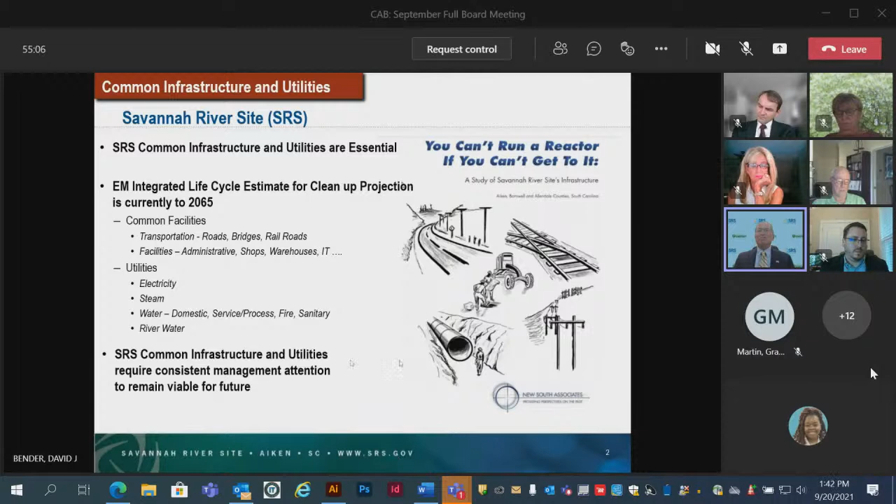And the site, as you know, is a busy place. These are our major operational mission facilities that are located on site. And this doesn't even include the future pit processing mission there in F area.

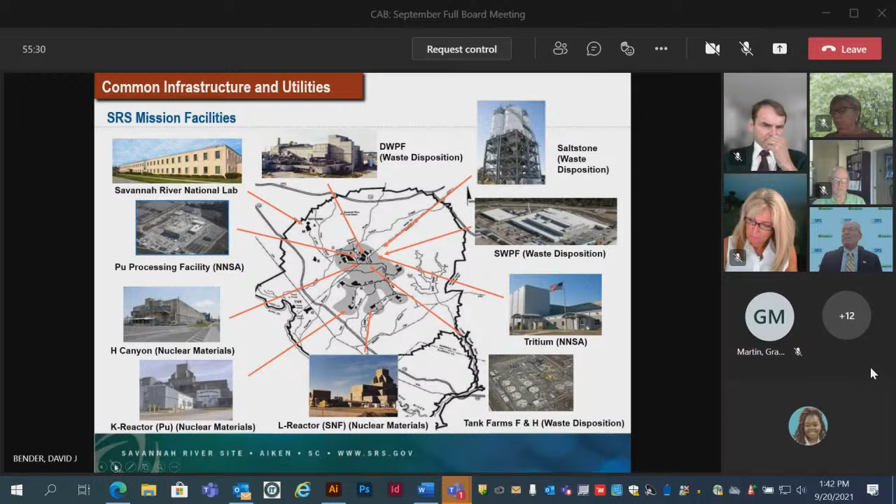And to support these mission facilities, just like any other city or large industrial park, we provide and take care of basic utilities that include roads and bridges, as well as domestic water and sanitary wastewater. And each area has its own fire water systems.

I would like to take a few minutes to point out some of the Savannah River site's unique infrastructure and utility systems. One of those is that we have steam plants. We have 5 steam plants that burn biomass wood chips as their primary fuel. And these provide steam energy for a mix of both processing as well as environmental controls.

Further, we're kind of unique for a DOE site in that we have 2 high hazard dams. And these dams themselves are not hazardous, this is simply basically a FEMA designation saying that there's a potential for loss of life downstream should one of these 2 dams fail. And I'm talking about what we call Par Pond and L Lake.

More unique is that we have a river water system. This system was originally designed to provide cooling water to the site's 5 heavy water reactors. Since then, the river water system has been tailored to provide water to our largest steam plant and to ensure that the radiologically contaminated sediments in our 2 major lakes, those are the 2 dams I mentioned earlier, stay covered with water.

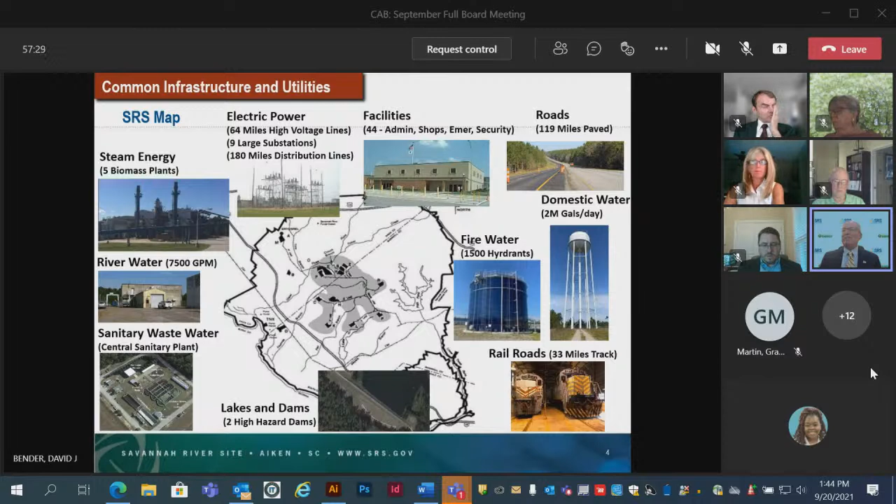Now, in the 2 previous slides, I talked about our major mission facilities and then our common infrastructure and utility systems. One thing that's really important is that I emphasize the difference between mission facilities and common infrastructure utilities. Why would that be important? Some of you probably already know, and that's because we have to figure out how we're going to pay for each of these. We'll see more of that on the next slide. But in this slide, I wanted to point out 3 of our basic common infrastructure types that we have.

The first basic type is just buildings, for our shops as well as our administrative areas, and of course roads and bridges. The other type of infrastructure we have is your basic utilities, not to mention river water that I talked about earlier, and of course our steam plants and steam distribution systems.

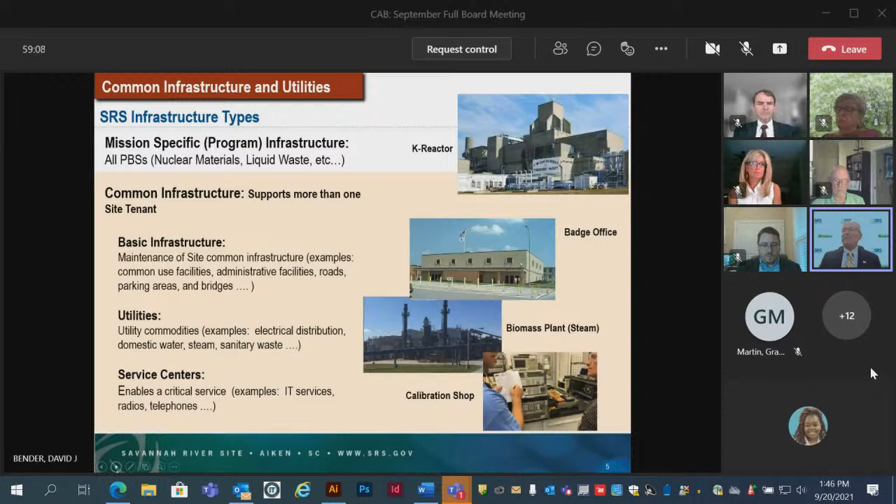Now, here's how we get funding to run SRS. Well, that comes through appropriations. And through appropriations, they get broken down to us into what's known as program baseline summaries. You'll hear a lot of talk about PBSs. So all of the mission programs, such as nuclear materials, has their own PBS. So does liquid waste and also our environmental cleanup mission.

So our common infrastructure isn't funded through PBSs. Our common infrastructure is funded by the site through the setting of rates, so that each year our PBSs can then contribute to funding our common infrastructure and utilities. So as you see on the left-hand side for our utilities and services, what we do is look at what we spent or what we required in the past. We look at what's forecasted, and then we have to look at what our requirement is to, say, provide electricity or provide water. And then we have to come up with a rate. And that rate is what the PBSs will need to pay in order to get that utility or service.

I think you've probably seen the insurance commercial, you know. So in this case, the mission facilities, through their PBSs, pay for what they need. This is pretty much like what you would do at your own house. Basically, you need electricity, therefore the local utility provider provides you with the bill on what you consume. Just like that, our mission facilities need electricity, and they pay basically through our site management and administration and accountants, a kilowatt per hour rate.

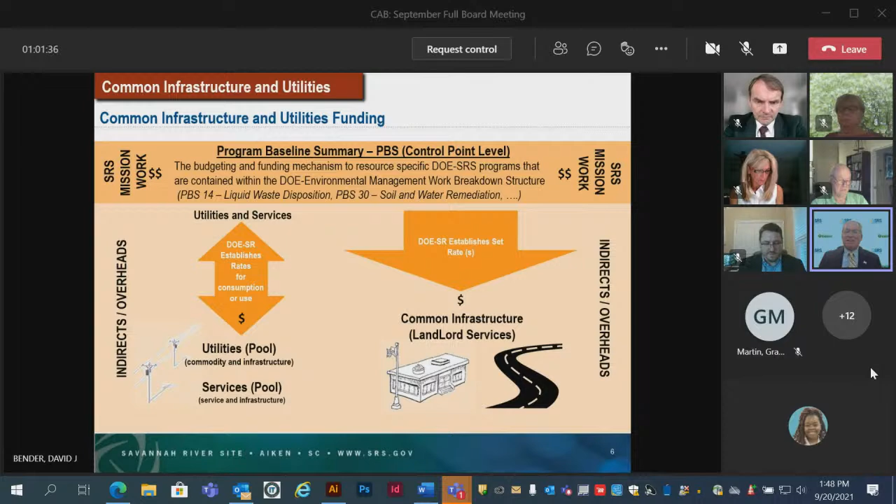Another way we can look at this difference between mission facilities and common infrastructure and utilities is what we call the fence. We often refer to inside and outside of the fence. So like your house, any plumbing or electrical work or even a roof repair, guess what, it belongs primarily to the homeowner. But up to, say, that electrical meter, then that belongs to the utility.

So much like that, in our case, inside the fence, the mission facility will take care of whatever they need to maintain their infrastructure to their PBS budget. Meanwhile, outside the fence, that is my or our responsibility. And that work is how we get funded through those indirect rates that I spoke on in the previous slide.

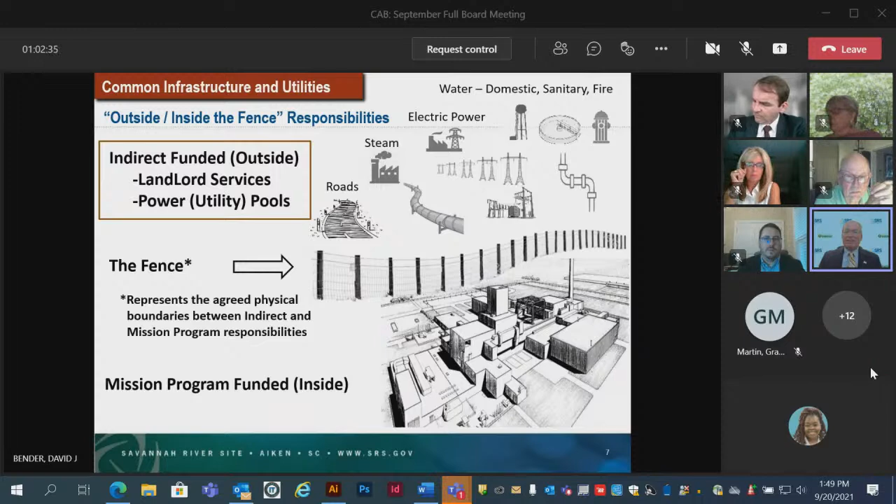Our mission is to provide infrastructure and utilities to the site to make it all work, and this is a 24/7, 365-day task. We report each system daily, look at what their status is and what they're trending monthly, and track all the improvement projects we're pursuing that year on a weekly basis.

Our job is also to look beyond just today and the immediate next week, but also into the future. So every 5 years, we do an in-depth study of each of our infrastructure and utility systems to forecast future requirements and the latest technologies out there, to propose recommendations for delivering more efficient and reliable services in the future. We are currently scoping out the remaining recommendations and building them into our 5-year improvement plan.

Not only are we working on these recommendations and dispositioning them, either incorporating them or finding that the initial recommendation in our right-sizing plan may not be feasible, but we're also looking at how we can incorporate sustainability when we do building improvements, to reduce our energy intensity across the site. We've been doing this quite well by incorporating cool roofs, and I'll show you a slide of that a little bit later, whenever we replace a roofing system on either one of our common infrastructure facilities or even our mission facilities.

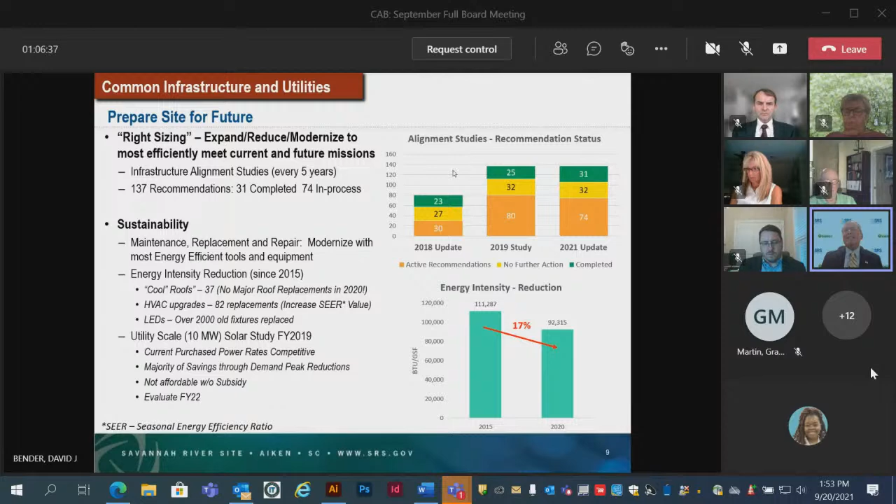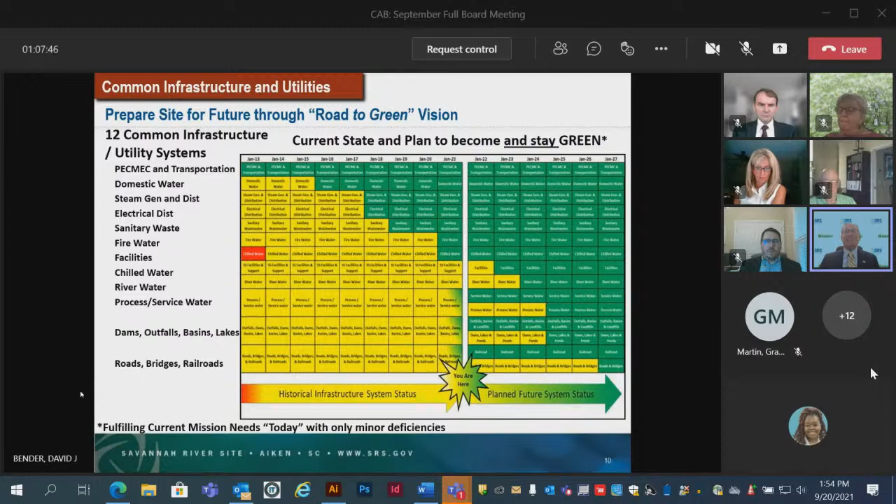Same thing a little bit with the utilities. Our budgets have been kept fairly constant because we want our mission facilities and mission programs to have first priority. We negotiate every year on how many dollars can go to landlord services through our indirect budgets and utility rates. This is very important in balancing mission and support, and it's never an easy decision each year as we go into our execution year.

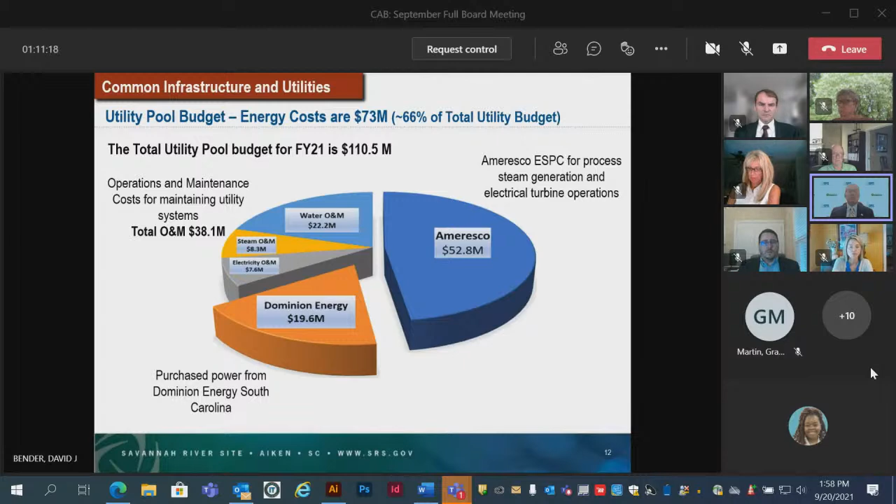Once we have all that information put together, we put together plans so that we could plan not only our operations and maintenance from day to day, but also our program for improvements based on what we believe our budgets are going to be in the out years. One of the things we do, which I'll talk about briefly later, is that we look at our risk—what do we need to provide reliable infrastructure, what do we need to fix in the next year to keep it green, and how can we make it more efficient?

And of course, we'll have to look hard at our budgets and make those hard decisions and prioritize. So each winter, we put together a new 5-year plan, and that coincides with a budget cycle.

What we do is make this a realistic plan. It's not a pipe dream that sits on a shelf where we say, gee, if we only had an extra $5 or $10 million, what would we do with it? No, this is a plan that we put together based on the funding that we believe, or we're pretty confident we're going to get, and yes, we include those projects that we believe we could execute if possible, if we got some extra money that year.

That means the programs have to have good, solid base budgets, and they've got to be able to execute those base budgets before we can have that good year. Also, what we put in these plans is that we resource the design dollars and the prep dollars so that we can get our engineers to work and have projects sitting on the shelf, so that when those good years arrive, we're going to be ready to execute.

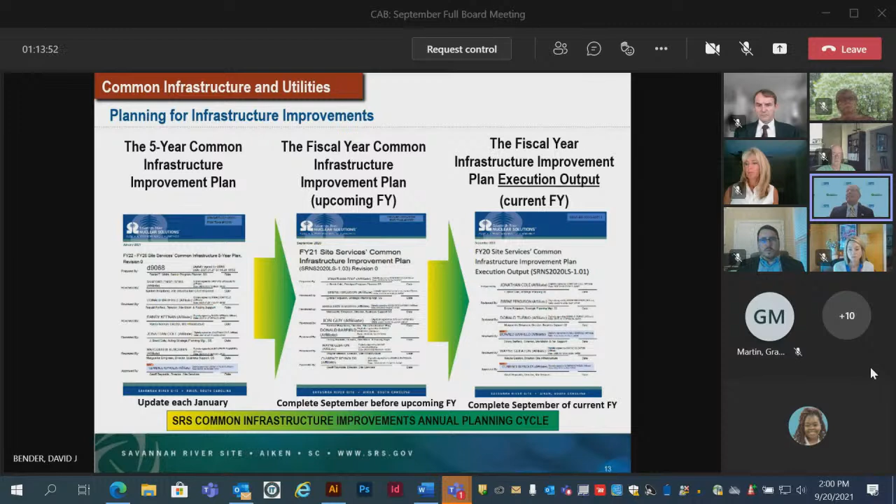So that's our cycle. We start with a 5-year plan. Based on that 5-year plan, we put together our next fiscal year plan, and then we evaluate and take our lessons learned from the current year plan and reincorporate that right back into the common infrastructure planning cycle.

Now we like to talk about the old car analogy. I'm proud to say I used to have a 25-year-old car I would drive to work. I maintained it, changed the oil like I was supposed to, checked the tires, made sure the lights worked. But did it have all the bells and whistles, the backup cameras, the Bluetooth systems, and was it as efficient as today's? Heck no.

Would I take it on a long trip? Probably not. So what I'm getting at is that we're doing a heck of a job maintaining these aged old systems and replacing when we can, but it's still, in some cases, not a 25-year-old car - the backbone of a lot of our infrastructure is up to 70 years old, and we're having to deal with that. So it's hats off to all the folks here at Savannah River Site who maintain these systems and keep them running reliably on a day-to-day basis.

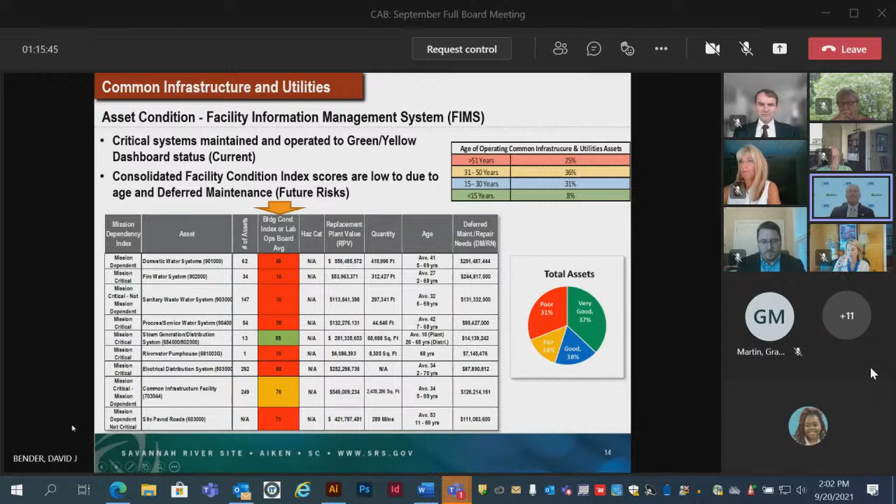I'm just going to go quickly through a few slides to highlight some of the notable issues that we have on a few of our critical systems.

And here we have electric power at Savannah River Site. We do have a local power provider, Dominion Energy, who you should be familiar with. They maintain our high voltage grid for us, as well as providing us with the commodity of electrical power. Over the years we've grown and have a great relationship with them, and they've been extremely responsive whenever there's a problem.

We maintain them right now, but another thing I'd mention in our right-sizing plan is that we've identified these transformers are oversized. They were originally put in to support, like in K area, a heavy water reactor and all its support facilities. Now it doesn't need nearly that much power, so we look forward to an opportunity to buy a transformer that's calculated at about a fourth to a third of the current size we have there right now, and of course be newer and more efficient.

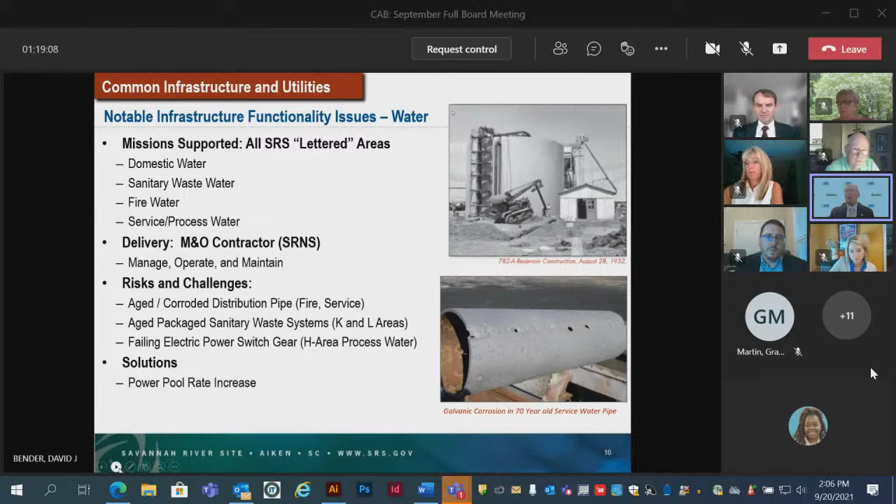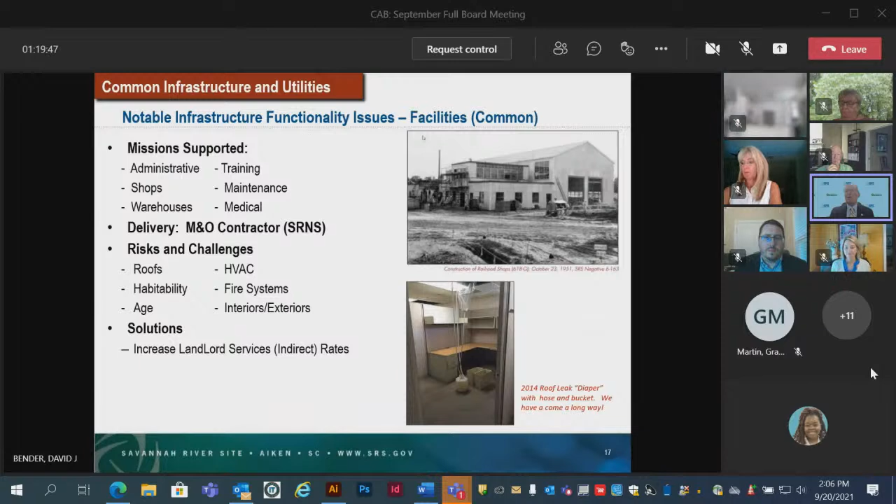I told you about our river water system, and I really love our river water system, but it's no longer used to provide cooling water to 5 heavy water reactors. But it is one of the site's most essential systems because it provides the water to our main steam plant, which provides steam energy that powers the tank farms and is essential for Canyon and the DWPF processes. It also provides water for other things, and that's keeping us out of environmental regulator trouble by keeping Par Pond and L Lakes full, so that the radiological contaminated sediments aren't exposed.

And right now, we're currently in the middle of a plan to replace that facility's 70-year-old electric power system, both transformers and switchgear. We're pretty confident we're going to be able to do that in the next 2 to 3 years.

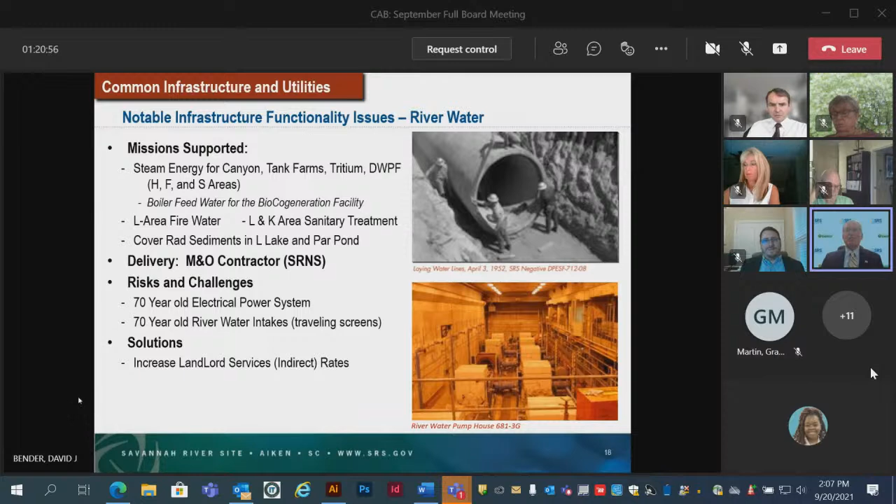Finally, everybody's favorite roads. Roads, except they're expensive to maintain and to keep them safe for all the 11,000 to 12,000 workers who come on Savannah River site every day. We've been doing a great job filling potholes and repairing shoulders, and in those good years from '17 to '19, we got 2 of our main roads done, and we got halfway on a third. Then we ran into some budget issues, but we had high hopes last year of picking up the pace again on repaving roads, but they were dashed by emerging needs and budget priorities.

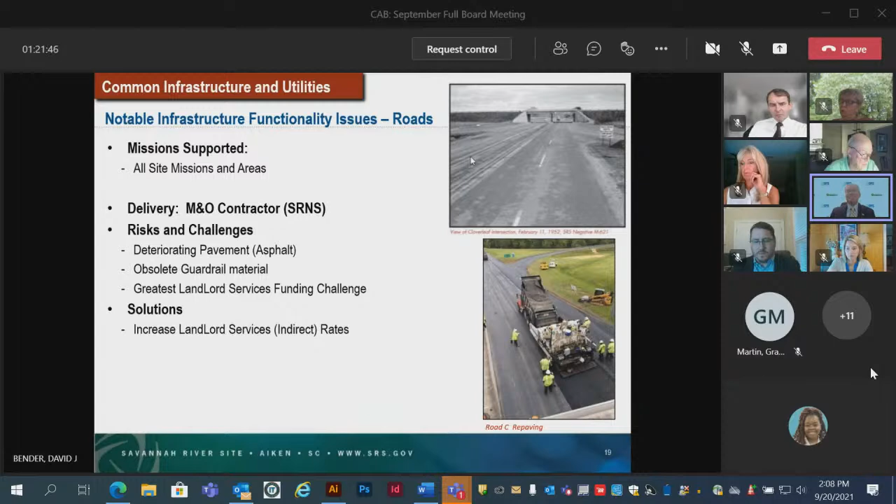Speaking of emerging needs, here's one that came up on us almost exactly a year ago to today, and by the time it got to us, it was Tropical Storm Sally. We had a major issue with a roof failure on one of our big admin training facilities there in H area. So we had to divert the dollars that we wanted to spend towards repaving Road C, the major road here on site, right in the middle of the site, to cleaning up all the damage, not just on that roof and building 766H, but also a number of old facilities whose drainage in and around, especially in the low-lying areas of A area, took a big impact too. So we had to spend a lot of dollars repairing Tropical Storm Sally damage.

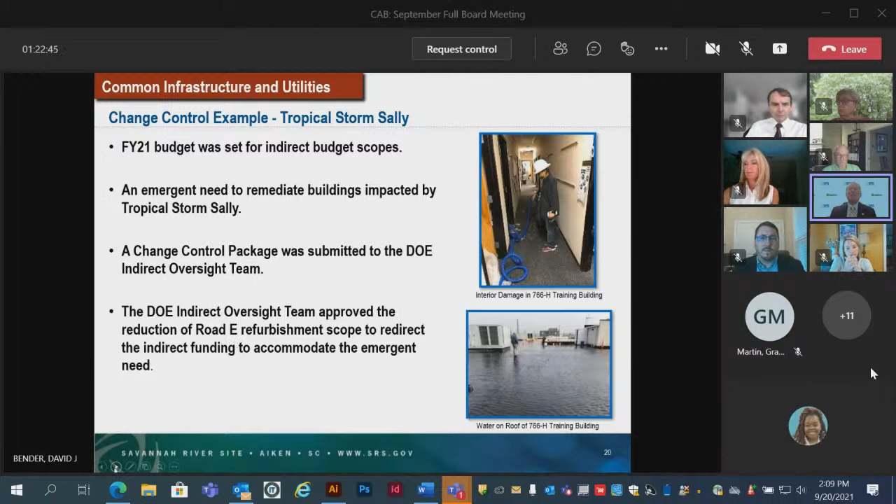Now, one of the things that we've done to try to highlight an area that we felt needed improvements was developing a facility habitability rating criteria. This is a tool we took on to basically prioritize which facilities needed improvements among others. We're talking about administrative facilities where people habitate, or reside in. And since we have meager dollars typically in a given year for infrastructure, we wanted to make sure we were addressing the needs of where people are. So we concentrate on administrative facilities and those that have definitely had maintenance neglected, and we're not just talking about common infrastructure facilities that normally fall under our indirect pool, but also the mission facilities as well.

We look at things like roofs, HVAC, and of course interiors of the facilities, as well as exteriors. Who wants to live in a building where the paint's coming off the walls, or it's not very appealing on the outside? So we looked at about 33 of these in FY20. And as we analyze the data, most of the problem is age. As you can see in the little pie chart there, only 8% of our common infrastructure systems are less than 15 years old, and the bulk of them fall within the 30 to 50-year-old category. So we use this to bring more attention to our administrative buildings, which usually get neglected in many cases.

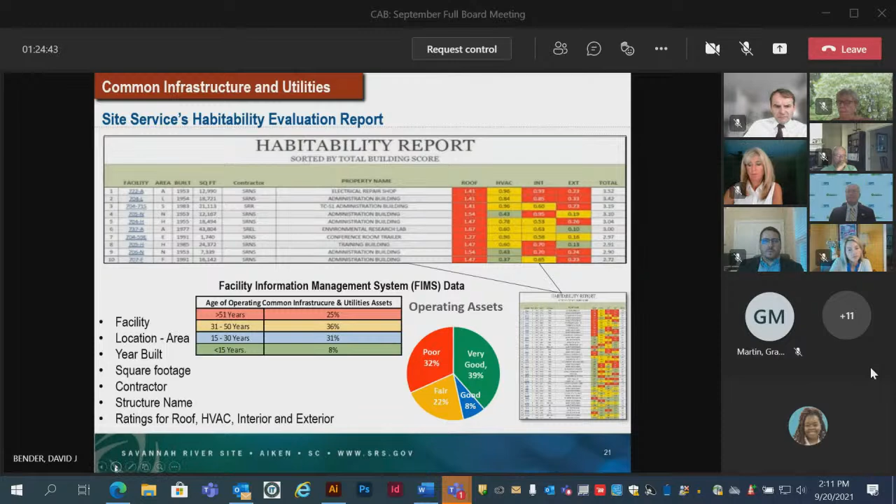As I said earlier, of our roughly $6.7 million budget that we had for our facilities and roads, we were only able to allocate about 14% for those repairs. So we keep a list, we prioritize, and it's just going to be something we're going to be looking at and working on for the next 5 to 10 years.

I'm going to jump back to sustainability a little bit. We're proud that we've come up with some pretty innovative ideas on Savannah River Site to improve the environment, as well as to save us energy and to actually improve safety.

Back in 2017 over in H Area, somebody came up with a good idea because the water quality from one of the detention ponds wasn't alkaline enough, and that was due to algae growth. So how do you keep algae from growing? It's kind of like a plant, so you cut off the sunlight. Essentially, thousands of these small 12-sided balls were placed inside this pool, and naturally they float up when the water gets high, and contract when the water gets down. That reduced the sunlight coming in, and that improved the water quality in that detention pond.

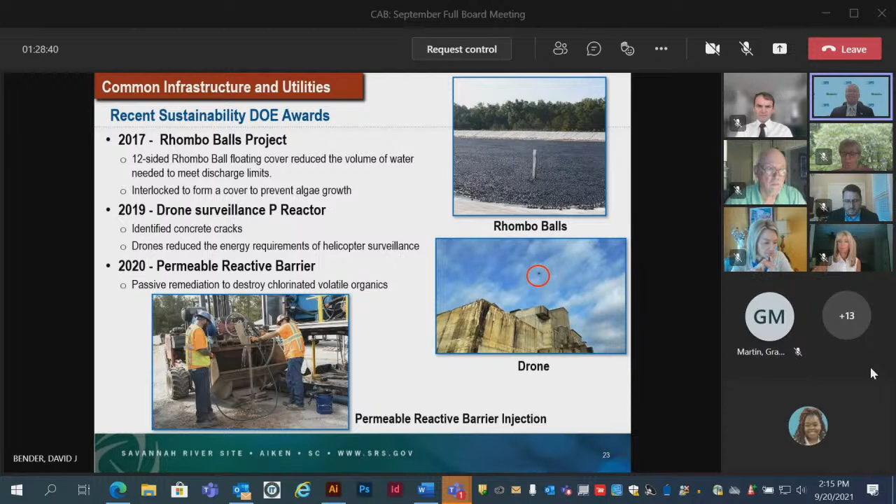I'm sure everybody is reading the newspapers or watching TV that zero emission vehicles are becoming more and more the thing to have, or are going to be necessary to fight climate change. So in keeping with that push towards zero emission vehicles, we are developing plans and designs to have 100% of our light duty fleet converted by 2030. Right now we are moving out in this next FY22 to design and construct charging stations for the 61 electric vehicles that Headquarters has said we would be allocated to receive in 23.

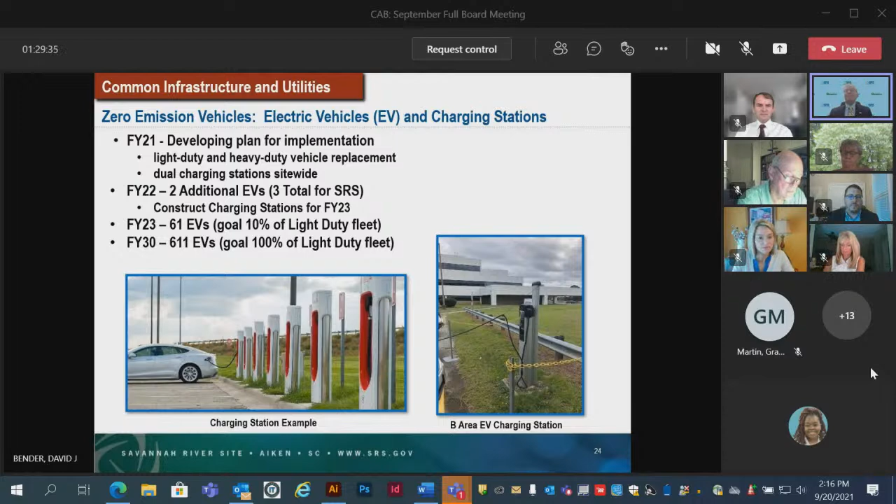Here's another sustainability, environmentally friendly thing that we did. When we were repaving those roads, we found that because the pavements were so bad, we had to mill up beyond just 1 or 2 inches of asphalt—in some cases as deep as 4 inches of milled asphalt. Normally that's waste material, and most companies would just haul it away to a landfill. But we decided we could use that stuff, and we worked with the Forestry Service to take it and use it to buttress up our secondary rock roads on site. So we were able to take all that material and repurpose it here on site.

Then on Road C, which is the major road that comes onto site—if you've been on site, you know when you go under the overpass, it either takes you to B Area or continues on to where the mission programs are—that's Road C, and it had about 60 culverts that needed to be replaced, because over the last 70 years many of them had failed, were clogged, and we had severe drainage problems on Road C.

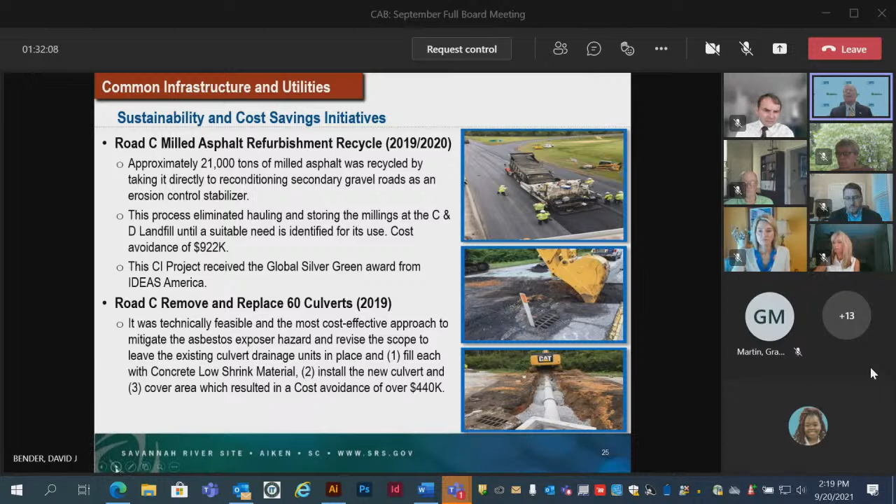And real quickly, I'm just going to go through. Things aren't all bad. We made some great progress here in the last couple of years, primarily, I would say, BC - before COVID.

In this case, we got a new HVAC system that we put on our measuring and test equipment facility, which is a very important facility because it's what gives the surety that everything on the mission side, all the measurements they're taking, are accurate. The HVAC system there is important because this facility requires very precise environmental controls, so that all their equipment is running to standard and is reliable.

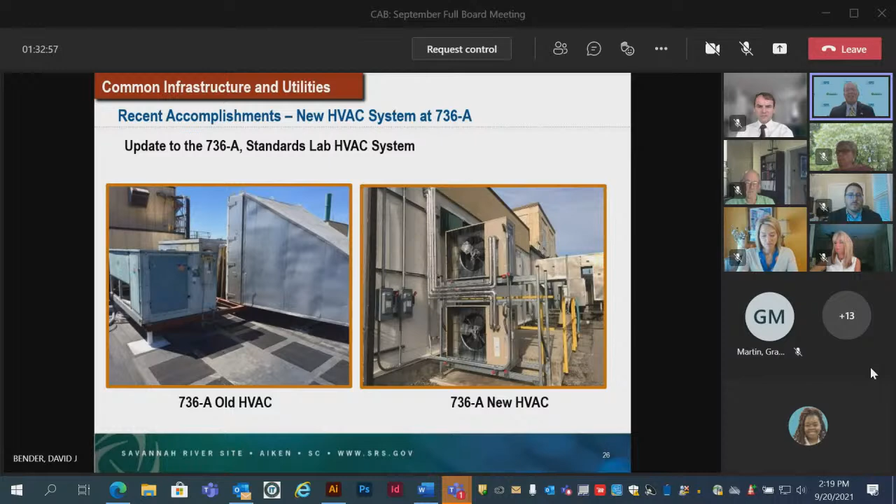And here, this is a good one. If you ever come back on site, I hope you can have the opportunity to dine at our new cafeteria facility, which is in the center of site at Building 766H.

That's our training facility, and this is just some pictures of some of the improvements that we did when we ripped out the existing serving area, redid the floors, redid the refrigerators, and redid all the stoves, etc. So we were really proud of the improvements that we did there, not only in the serving area, but also there in the dining area.

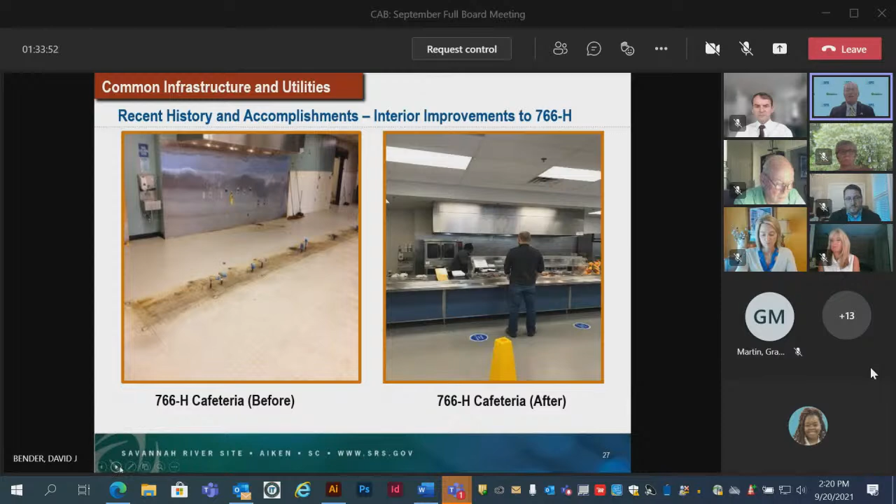You'll see instead of kind of a very, very funny carpet type material, we now have better flooring. We added some TVs at each end, and improved the lighting and made it more open.

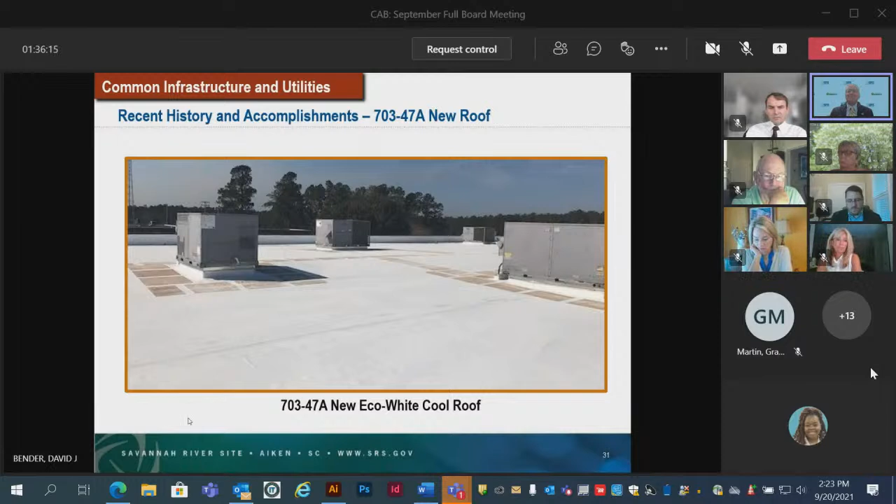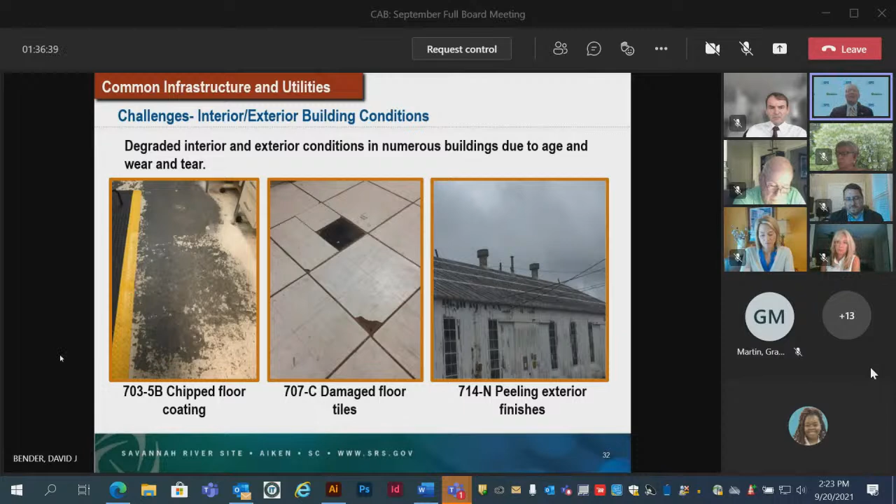And still there's always some work to do, just to say that we do have some ugly buildings out there that we need to take care of, either to demo or to bring them back up to standard so they can do their job, what we need them to do. So we're constantly looking at how we can get the funding necessary to fix these problems.

And one of the ways that we do that, especially for the big projects, is that when it comes to an infrastructure risk, we have an elaborate, very sophisticated method for prioritizing. Since dollars are always scarce, we want to make sure we spend them on the thing that's going to hurt us the most and soonest, so we have a risk scoring criteria - 10 criteria that each has to be graded for each different risk that we feel an infrastructure project could help solve.

And we also evaluate it with 4 business case type criteria. That gives us an overall number, and we rank and stack them, and of course go through a lot of discussion on how best we could spend those dollars that we get each year.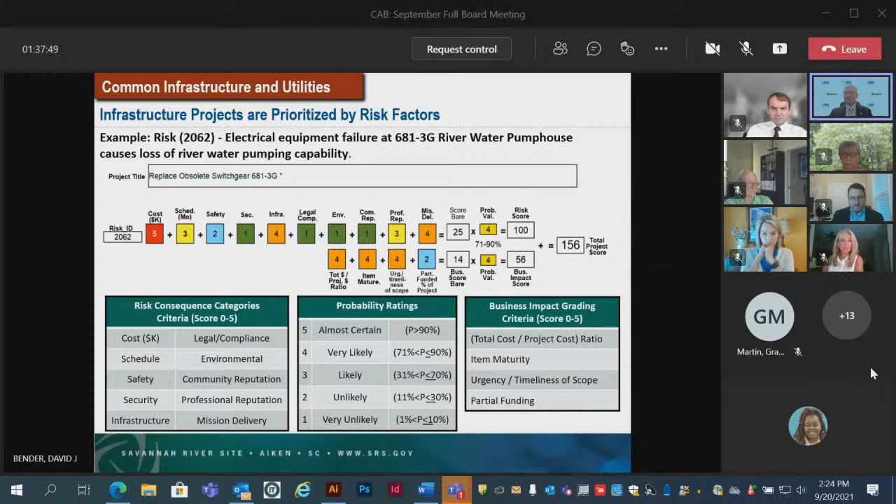And I think finally, yeah, I just wanted to wrap up and say that we were working hardest to improve the reliability of our common infrastructure and our utility system, so that they're there to support our current and future missions, not only just for DOE SR, but also for NNSA.

And you saw that we really work hard at prioritizing. We base that on risk more than anything else, as well as what we know we need to do when it comes to maintaining utility systems and buildings. And we try to keep the risk out in front of us. We don't want to ever realize them. So that's our big goal, is try to get ahead of risk, keep the site running from day-to-day basis, and always thinking that we need to be pushing forward those infrastructure improvements that'll get us out into the out years.

Especially if we're going to have to be here at least till 2065. And we have a great team standing by to execute all those improvement projects that are in our plan, especially our 5-year plan. We just need those dollars to give us the resources we need to fully execute that. We're proud of the work that we've done and look forward to a long future of continued reliable operations for our common infrastructure and utilities, so that we can support the Savannah River site. And with that, I look forward to your questions.